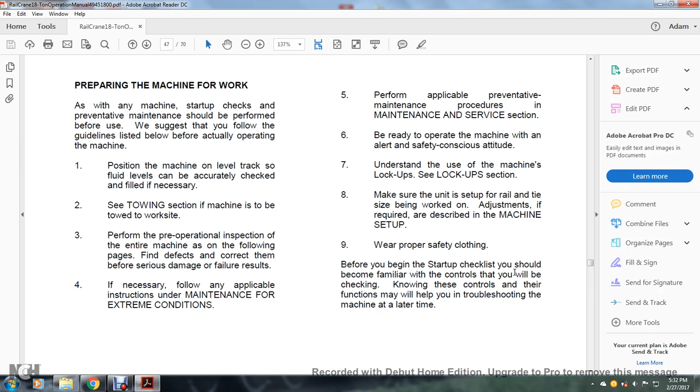Before you begin the startup checklist, you should be familiar with the controls that you should be checking. Knowing these controls and their functions may be helpful to you with troubleshooting the machine at a later time.

Startup warning: this machine must not be used until it is inspected and operating properly. Do not operate this machine unless you have been properly trained as described in the operation and safety manual, and are a qualified person authorized to operate the machine.

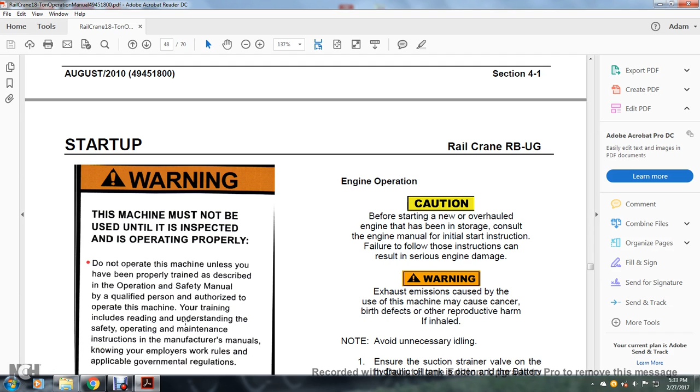Your training includes reading and understanding the safety, operation, and maintenance instructions in the manufacturer's manual, knowing the employer's work rules and applicable government regulations, and following the instructions of the operating manual.

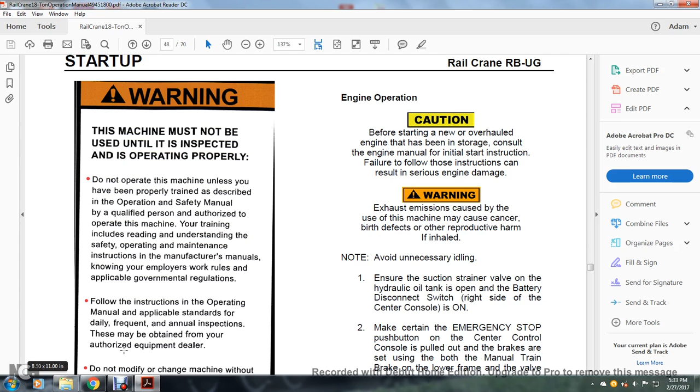Applicable standards for the daily, frequent, and annual inspections may be obtained from the dealer, an authorized equipment dealer. Do not modify or change the machine without written approval of the manufacturer.

Operate the machine with extreme caution. Stop all operations if any malfunctions occur. Improper use of this machine could cause death or serious injury.

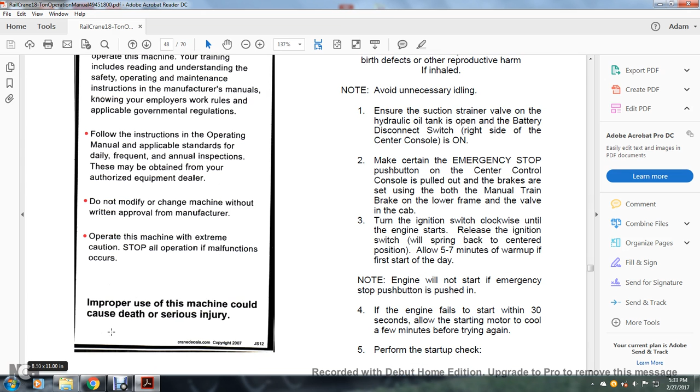Engine operation caution: before starting a new, overhauled, or stored engine, consult the engine manual for the initial startup instructions. Failure to follow these instructions can result in serious engine damage.

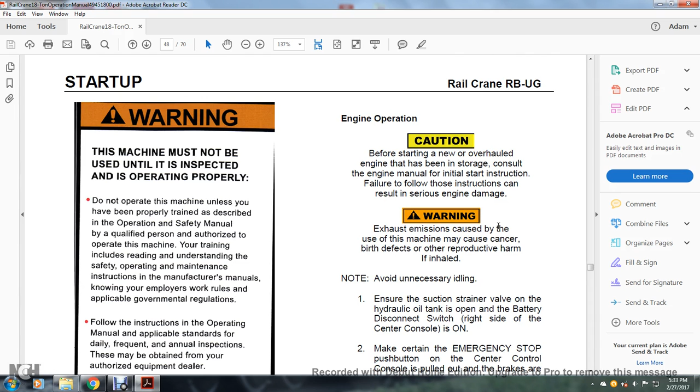Warning: exhaust emissions caused by operating the machine may cause cancer, birth defects, or other reproductive harm if inhaled. Note: avoid unnecessary idling. Ensure the suction strainer valve on the hydraulic oil tank is open.

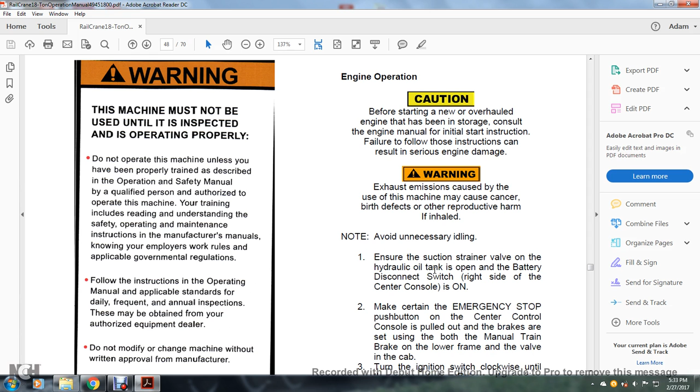Make sure the battery disconnect switch on the right side of the central console is on. Make sure the emergency stop push button on the central console is pulled out, and the brakes are set on both the manual train brake on the lower frame and the valve in the cab.

Turn the ignition switch clockwise until the engine starts, then release the ignition switch; it will spring back to the center position. Allow 5 to 7 minutes for warm-up on the first start of the day.

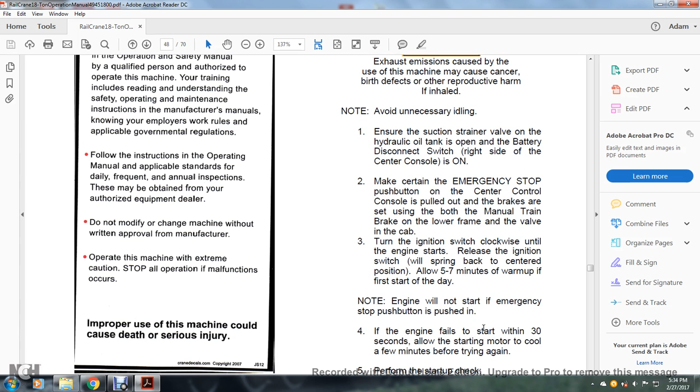Note: the engine will not start if the emergency stop push button is pushed in. If the engine fails to start within 30 seconds, allow the starting motor to cool for a few minutes before trying again. Then perform the startup checkup.

Startup checklist, general machine status: verify all load chart safety warning labels and control labels are present and legible. Make certain all safety devices function properly. Ensure swing lockouts are installed between the counterweight and the lower deck prior to starting the engine.

Check the hydraulic system hoses, tubes, and fittings for leaks. Inspect the lattice booms, checking for bends or other damage. Do not operate the machine if defects are present.

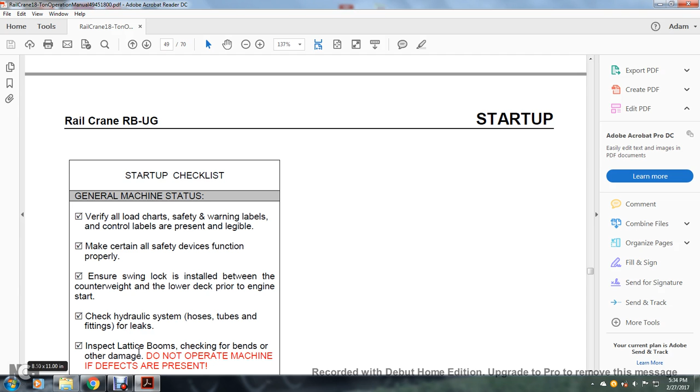Inspect the winches; make sure the wire rope is properly reeved on the sheaves, and that all connection pins and retaining devices are properly installed. Inspect the wire ropes; do not operate the machine if defects are present.

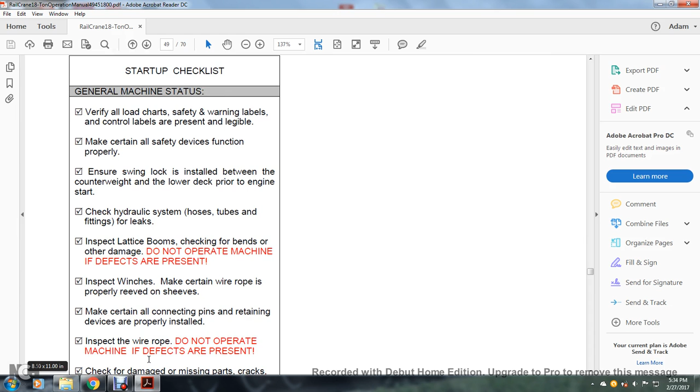Check for damage, missing parts, cracks, or bends. If any of these are present, do not operate the machine until repaired.

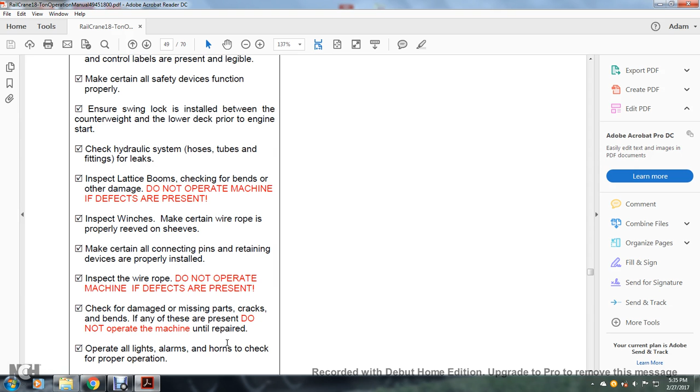Operate all the lights, alarms, and horns to check for proper operation. Test the anti-two-blocking device to check for proper operation. Inspect all controls, cables, and harnesses to make certain all connections are tight and the controls function properly.

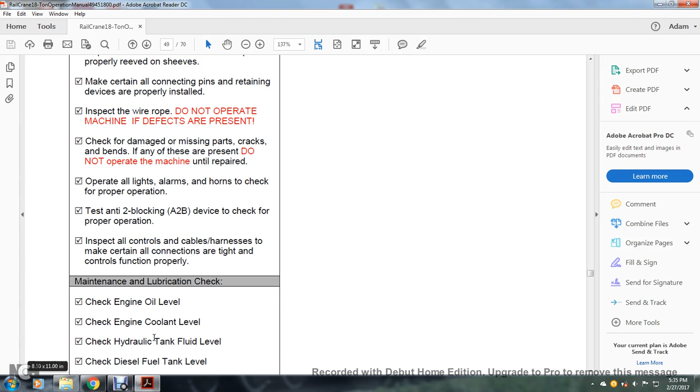Maintenance lubrication oil check: check the engine oil level, check the engine coolant level, check the hydraulic tank fluid level, and check the diesel fuel tank fluid level. Perform all daily maintenance requirements; see inspection maintenance later in this manual.

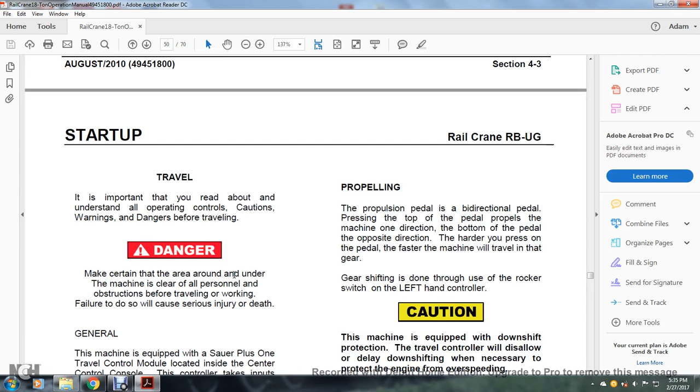Or continue with startup and travel. It's important that you read and understand all the operating controls and the caution, warning and danger notes before traveling. Danger: make certain that the area around and under the machine is clear of all personnel and obstructions before traveling and working. Failure to do so can cause injury or death.

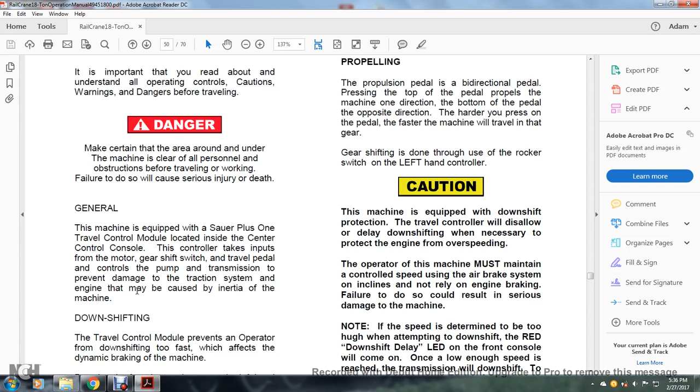General. This machine is equipped with a Sauer Plus One travel control module located inside the center of the control console. The control takes the inputs of the motor, gear shift switch, travel pedal, and control of the pump and transmission to prevent damage to the traction system and the engine that may be caused by the machine. The travel control module prevents the operator from downshifting too fast. This affects the dynamic braking of the machine.

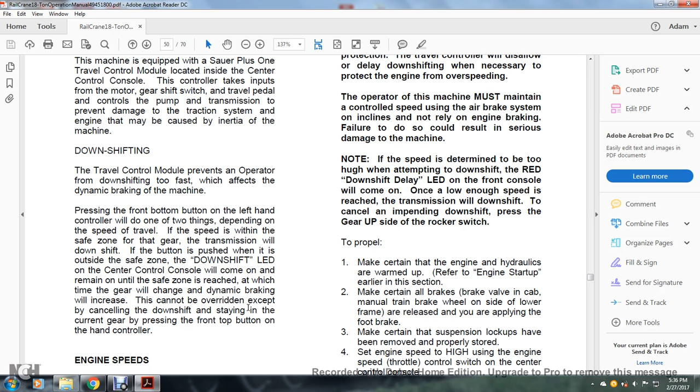Press the front of the button with the left hand and the control will do one of two things depending on the speed of travel. If the speed is within the safety zone for the gear, the transmission will downshift. If the button is pushed outside the safety zone for the downshift, the LED on the control console will come on and remain until the safe zone is reached. At that time the gear will change and the dynamic braking will increase. It cannot be overridden except by canceling the downshift and staying in the current gear, pressing the front top of the button on the hand controller.

Engine speeds. Engine speed settings are preset, and the high and low speeds are selected using the engine speed control switch on the center console. Engine speed should be at a high of 2100 RPM during travel and work operations and at a low of 1100 RPM while idling.

Propelling. The propulsion pedal is a bidirectional pedal. Press the top of the pedal to propel the machine in one direction, the bottom of the pedal in the opposite direction. The harder you press on the pedal, the faster the machine will travel in the gear. Gear shifting is done through the use of the rocker switch on the left hand controller.

Caution, the machine is equipped with downshift protection. The travel control will also disallow or delay downshifting when necessary to protect the engine from overspeeding. The operator of the machine must maintain control of speed using the air brake system on inclines. Do not rely on engine braking. Failure to do so could result in serious injury and damage to the machine.

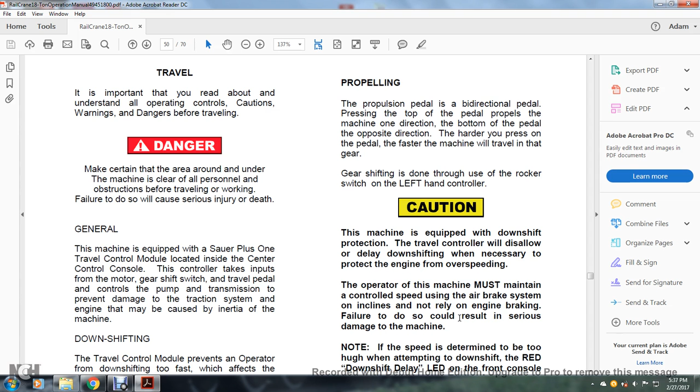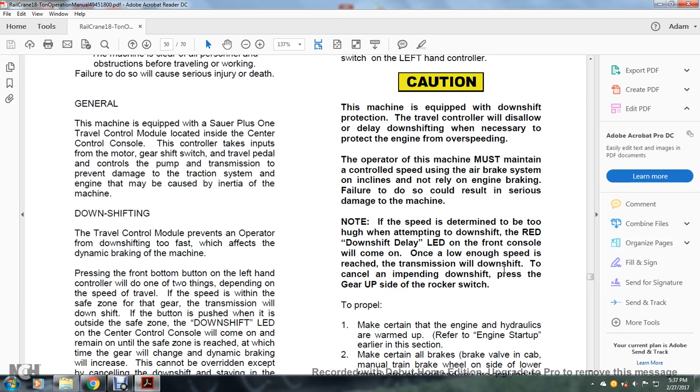Note, if your speed is determined to be too high when attempting to downshift, the red downshift delay LED on the front console will come on. Once a low enough speed is reached, the transmission will downshift. To cancel an impending downshift, press the gear up on the rocker switch.

Alright, to propel, make certain that the engine and the hydraulics are warmed up. Refer to the engine startup earlier in this section. Make certain that the brake valve in the cab and the manual train brake wheel on the side of the lower frame are released, so that you are applying the foot brake. And make certain that the suspension lockups have been removed and properly stored. And set the engine to high speed using the engine speed throttle control switch on the center of the console.

5. Release the brake foot pedal. 6. Use the rocker switch on the left hand control front push button, looking at the gear selection LEDs on the center console. Press the switch in the up direction once and slowly press the propulsion pedal until the machine reaches top speed in that gear. Release the pedal halfway, to 50%, press the gear switch again, and repeat until the desired speed and gear has been reached.

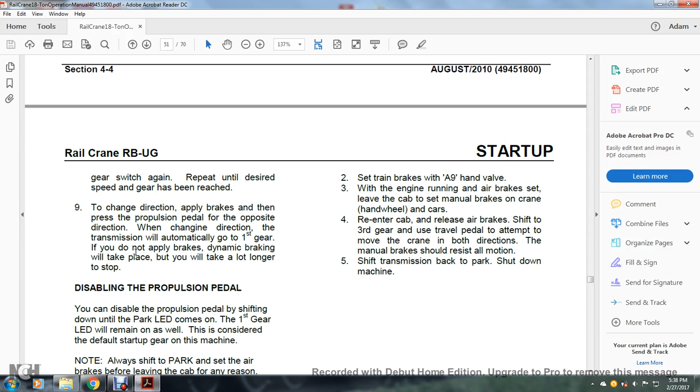To change direction, apply the brakes, then press the propulsion pedal in the opposite direction. When changing direction, the transmission will automatically go into first gear. If you do not apply the brakes, dynamic braking will take place, but it will take a lot longer to stop.

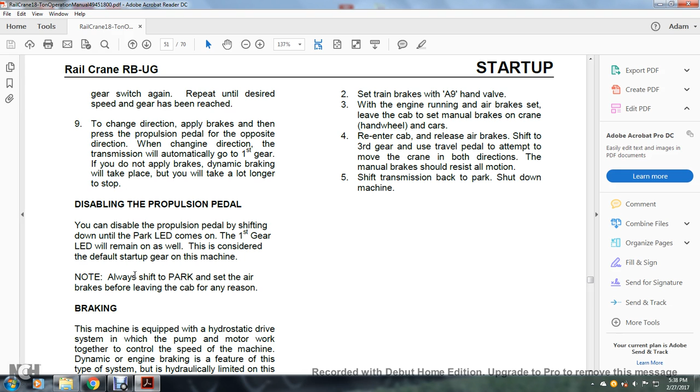Disabling the propulsion pedal. You can disable the propulsion pedal by shifting down until the LED comes on, and the first gear LED will remain on as well. This is considered the default startup gear on the machine. Note, always shift to park and set the air brakes before leaving the cab for any reason.

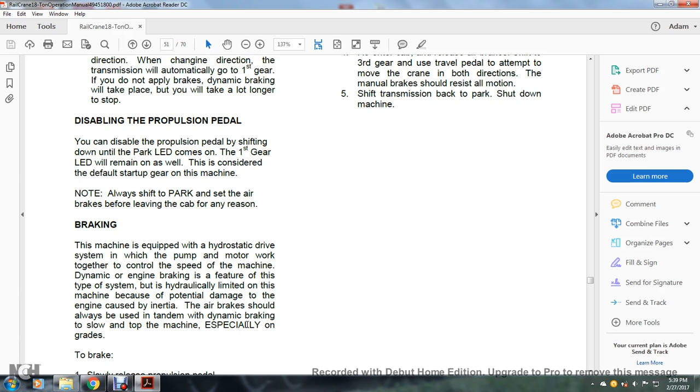Braking. The machine is equipped with a hydrostatic drive system in which the pump and the motor work together to control the speed of the machine. Dynamic engine braking is a feature of this type of system, but it is limited on this machine because of the potential damage to the engine. The air brakes should always be used in tandem with dynamic braking to slow and stop the machine, especially on grades. To brake, slowly release the propulsion pedal, slowly apply the brake pedal, and downshift as permitted.

Parking brakes. Warning, do not leave the crane unattended without setting the manual brake system.

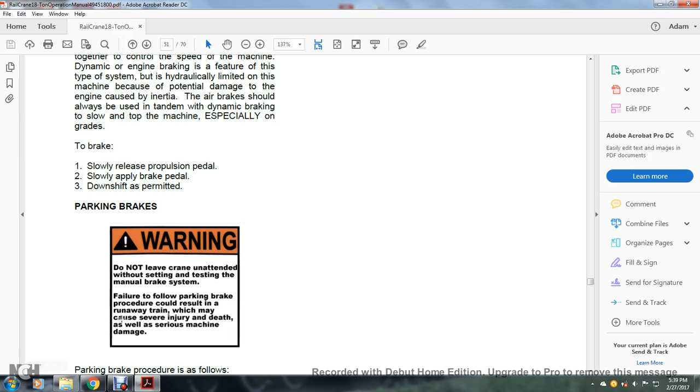Failure to follow the parking brake procedure could result in a runaway train, which may cause severe injury, death, as well as serious injury and machine damage. Parking brake procedures as follows. Ensure the machine has come to a complete stop and then shift the transmission to park. Set the train brakes at A9 hand valve.

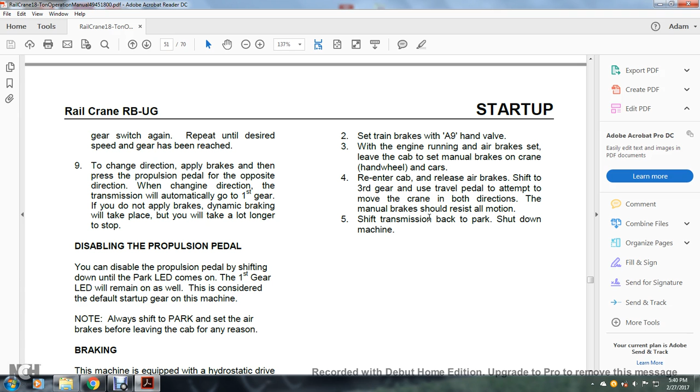With the engine running and the air brakes set, leave the cab to set the manual brakes on the crane and the hand wheel in the cars. Re-enter the cab, release the air brake, shift to the third gear, and use the travel pedal to attempt to move the crane in both directions. The manual brakes should resist all motion, and shift transmission back to park. Shut down machine.

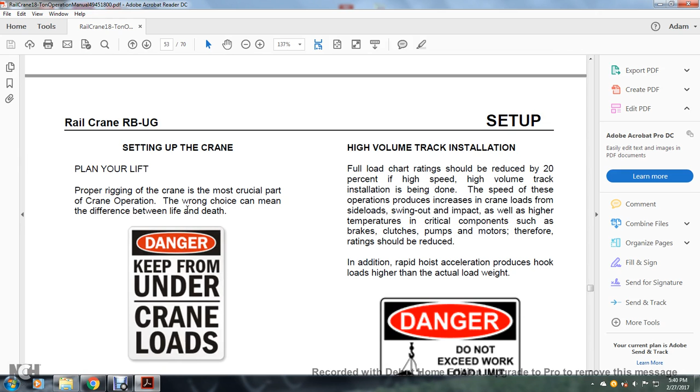Setting up the crane. Plan your lift. Proper rigging of the crane is the most crucial part of the crane operation. Wrong choice can mean the difference between life and death. Danger. Keep out from under the crane loads. Danger. Failure to obey the following will result in death or serious injury and instability, structural damage.

Read and understand the following: the crane load work area charts. Do not exceed the winch or crane ratings. Weight limited. The weight of accessories attached to the boom and the load must be deducted from the load chart ratings and added with the load weight. Do not exceed the manual boom extension or jib load ratings at reduced boom lengths.

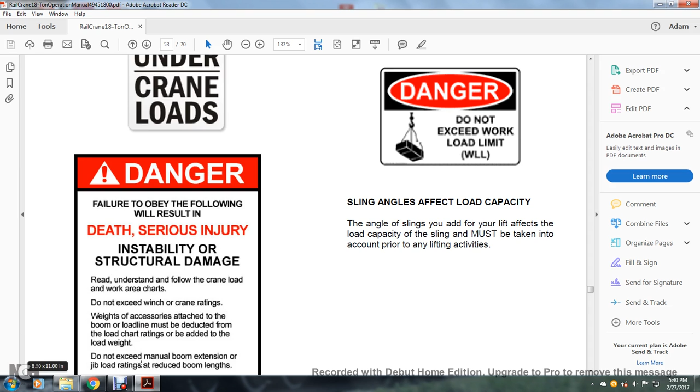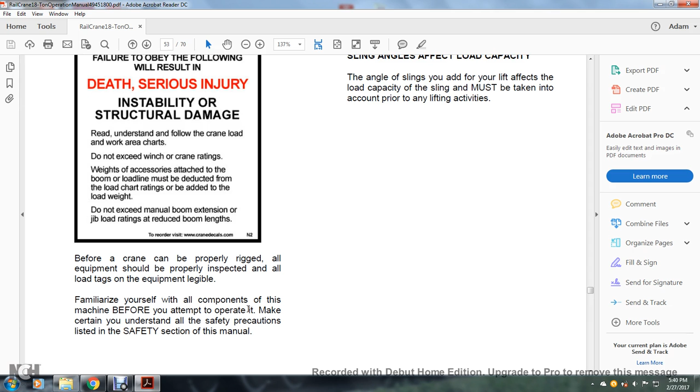Before the crane can be properly rigged at all, the equipment should be properly inspected and all load tags on the equipment legible. Familiarize yourself with all the components of the machine before you attempt to operate it. Make sure that you understand all the safety precautions listed in the safety section of this manual.

High volume track installation. The full load chart rating should be reduced by 20% if high speed, high volume track installation is being done. The speed of these operating procedures increases the crane loads from side loads, swing out and impact, as well as higher temperatures on critical components such as brakes, clutches, pumps, motors, and therefore ratings should be reduced. Additionally, rapid hoist acceleration produces a hook load higher than the actual load weight.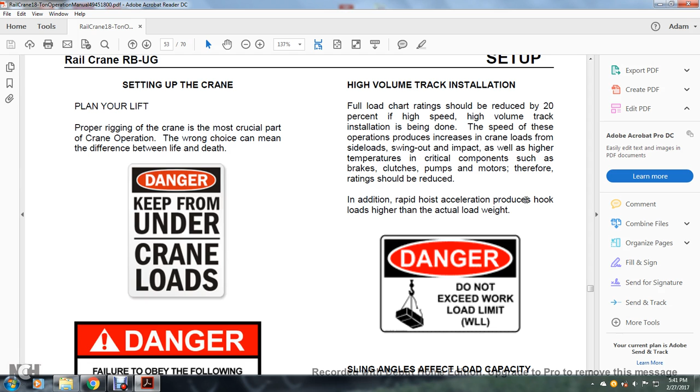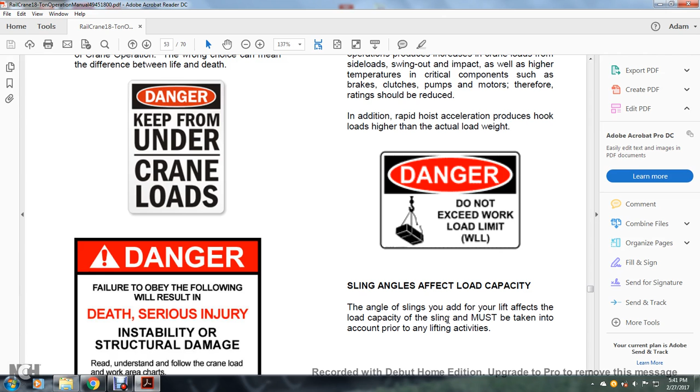Danger: do not exceed the working load limit. Sling angles affect the load capacity. The angles of slings you use for your lift affect the loading capacity of the sling and must be taken into account prior to any lifting activities.

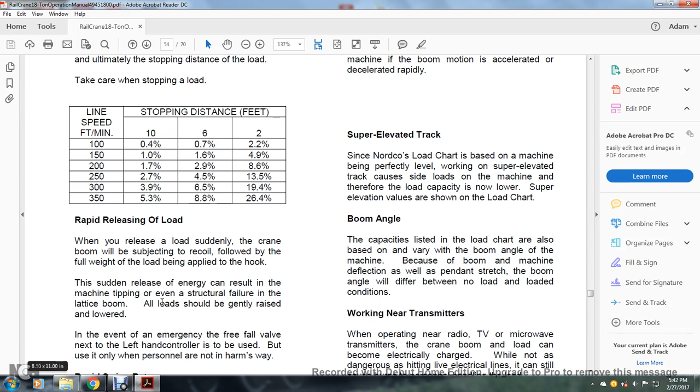Rapidly releasing loads. When you release the load suddenly, the crane boom will be subject to recoil, followed by the full weight of the load being applied to the hook. The sudden release of the energy could result in the machine tipping and even in structural failure in the lattice boom. All loads should be gently raised and lowered. In the event of an emergency, free fall: the valve next to the left-hand control is to be used only when personnel are not in harm's way.

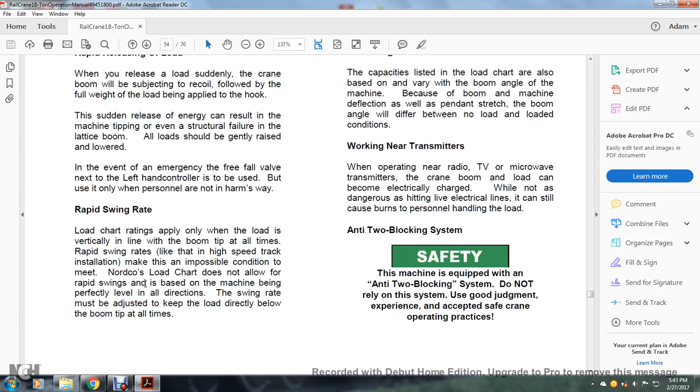Rapid swinging rate. Load charts. The rating is applied only when the load is vertically in line with the boom tip at all times. Rapid swing rates, like on any high-speed track installation, make it an impossible condition to meet. The Nordco load chart does not allow for rapid swing rates and is based on the machine being perfectly level in all directions. The swing rate must be adjusted to keep the load directly below the boom tip at all times.

The centrifugal force of a high-speed swing creates a forward tipping load. At a high boom angle, the boom could collapse over the back of the machine if the boom motion is accelerated or decelerated rapidly. Super elevated track: since Nordco load charts are based on the machine being perfectly level, working on super elevated track causes side loading of the machine, and therefore load capacity is now lower. Super elevation values are shown in the load chart.

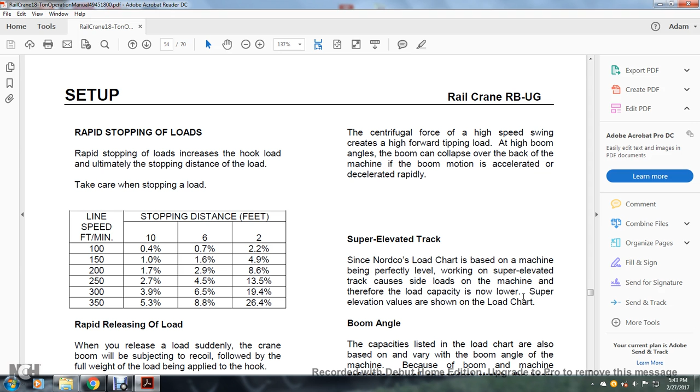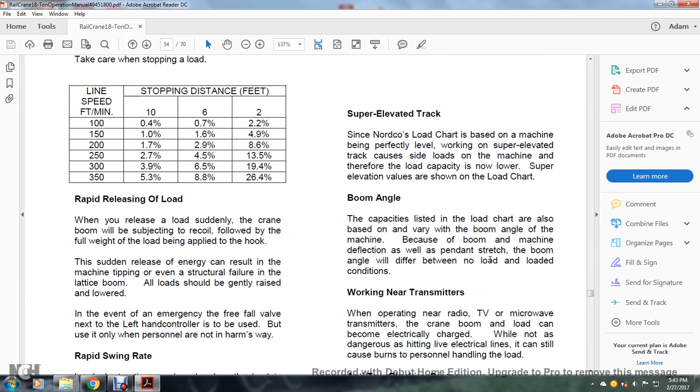Boom angle: the capacities listed on load charts are also based on the boom angle of the machine. Due to boom deflection as well as pendant stretch, the boom angle will differ between no load and loaded conditions. Working near transmitters.

When operating near a radio, TV, or microwave transmitter, the crane boom and the load can become electrically charged. While not as dangerous as hitting live electrical lines, it can still cause burns to personnel handling the load.

Anti-two-blocking system. Safety. The machine is equipped with an anti-two-blocking system. Do not rely on the system. Use good judgment, experience, and accepted safe crane operation practices.

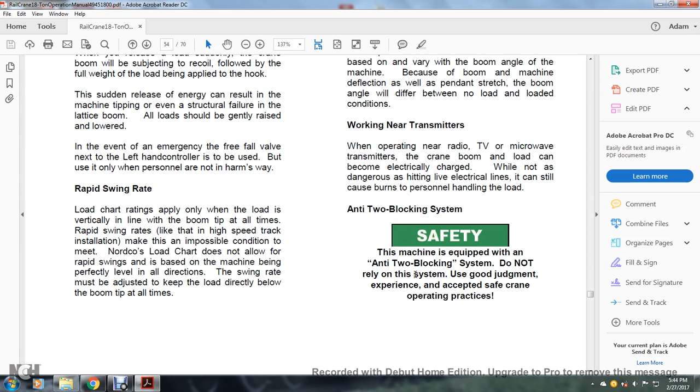Alright, two-blocking the winch cable can happen with an untrained and inexperienced operator. Two-blocking occurs when the winch cable has been retracted too far, or if the boom is extended without letting out the cable. Either way, the winch cable can be damaged by crimping or over-tension, and the sheave may also be damaged. The anti-two-blocking system helps prevent this kind of damage by sensing the position of the winch cable attachments with respect to the sheave case, and shutting down the function causing the two-blockage.

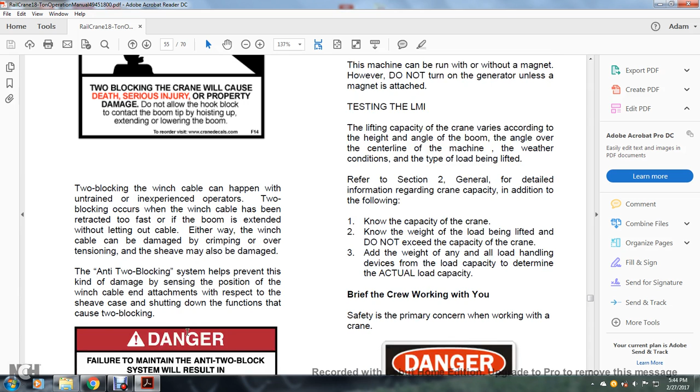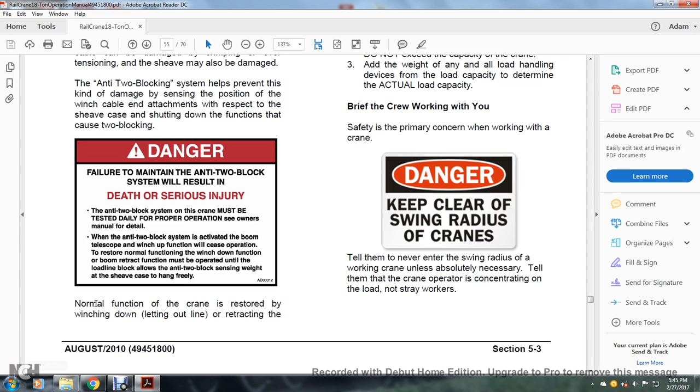Alright, danger. Failure to maintain the anti-two-blocking system will result in death or serious injury. The anti-two-blocking system on the crane must be tested daily for proper operation. See owner's manual for details. When the anti-two-blocking system is activated with boom telescope or winch up, the function will cease operation. To restore normal function, winch down. The retraction function must be operated until the load block allows the anti-two-blocking sensing weight at the sheave case to hang freely. Normal function of the crane is restored by winching down, letting out line, or retracting.

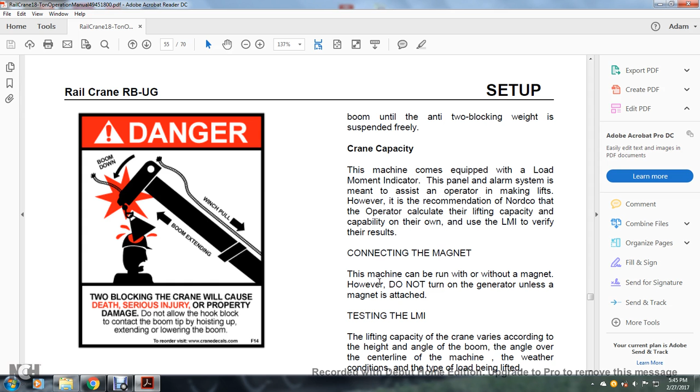Retract the boom until the anti-two-blocking weight is suspended freely. Crane capacity: the machine comes equipped with a load moment indicator panel and alarm system to assist the operator in making lifts. However, Nordco recommends operators calculate the lifting capability on their own and use the load indicator to verify the result. Connecting the magnet: the machine can be run with or without a magnet. However, do not turn the generator on unless the magnet is attached.

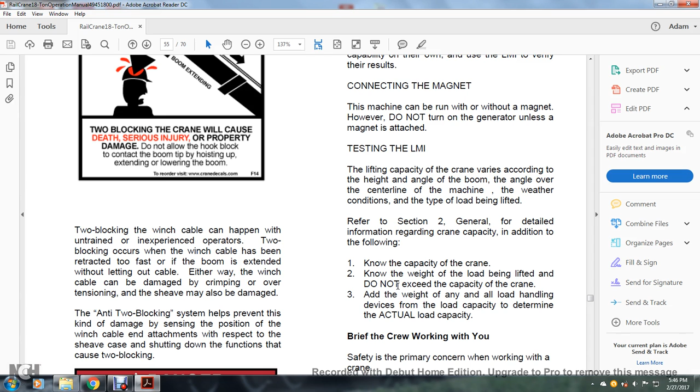Testing the LMI. The lifting capacity of the crane varies according to the height and angle of the boom, the angle from the center line of the machine, the weather conditions, and the type of load being lifted. Refer to Section 2, General, for detailed information regarding crane capacity. In addition, note the capacity of the crane and the weight of the load being lifted, and do not exceed the capacity of the crane. Add the weight of the load and all load handling devices to determine the actual load.

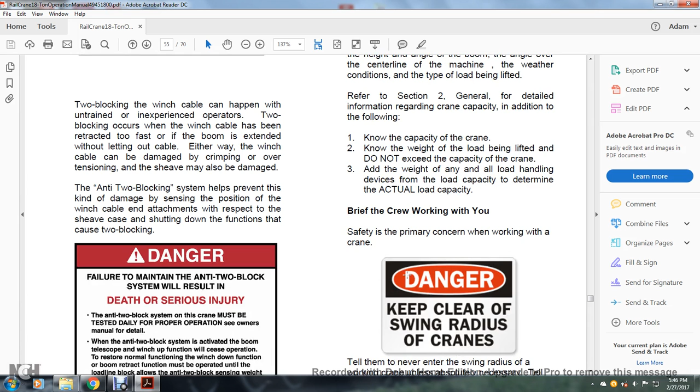Brief the crew workers you're working with. Safety is the primary concern when working with a crane. Danger, keep clear of the swing radius of the crane. Tell them never to enter the swing radius of a working crane unless absolutely necessary. Tell them the crane operator is concentrating on the load, not stray workers.

Weather safety conditions. Weather conditions can adversely affect lifting activity and need to be thoroughly considered during the planning and execution of the lift. Special efforts may be required to ensure adequate warning is provided to avoid a sudden storm disrupting lifting progress.

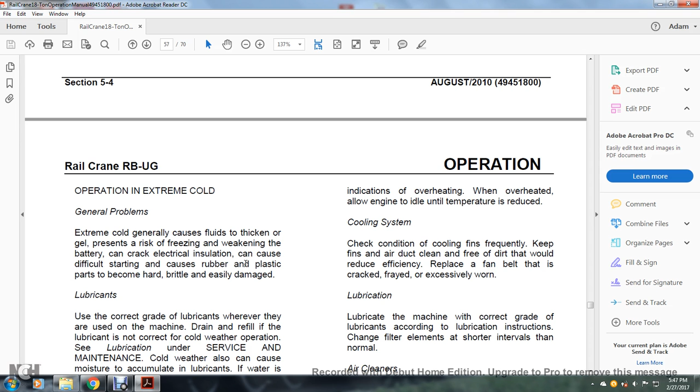Operation in extreme cold. General problems. Extreme cold generally causes fluids to thicken and gel, presents the risk of freezing, weakens the battery, can crack electrical insulation, and causes the rubber and plastic parts to become hard, brittle, and easily damaged. Lubrication. Use the correct grade of lubrication; drain and refill if the lubrication is not correct for cold weather operation. See lubrication under the section on maintenance.

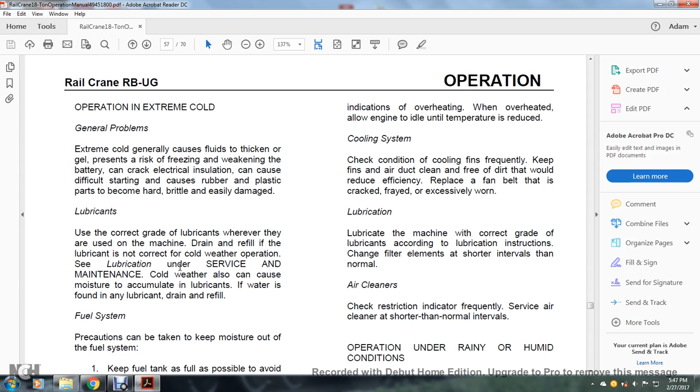Cold weather can also cause moisture to accumulate in lubricants. If water is found in any lubricant, drain and refill. Fuel system: precautions should be taken with care to keep moisture out of the fuel system. Keep the fuel tank as full as possible to avoid condensation. Remove ice and snow from the area of the fill opening before refilling.

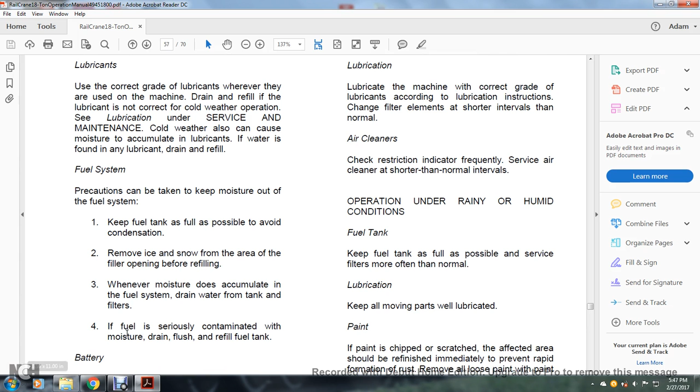Whenever moisture does accumulate in the fuel system, drain water from the tank and the filters. If the fuel is seriously contaminated with moisture, drain, flush, and refuel the tank. Fuel tank. Battery. Keep the battery fully charged. Cranking power of the battery is reduced in extreme cold.

Engine operation. Run the engine at low speeds only long enough to circulate the oil through the engine, and then increase the speed to warm up the engine. Extended idling during extreme cold temperatures can cause incomplete combustion and heavy deposit formation on the valves.

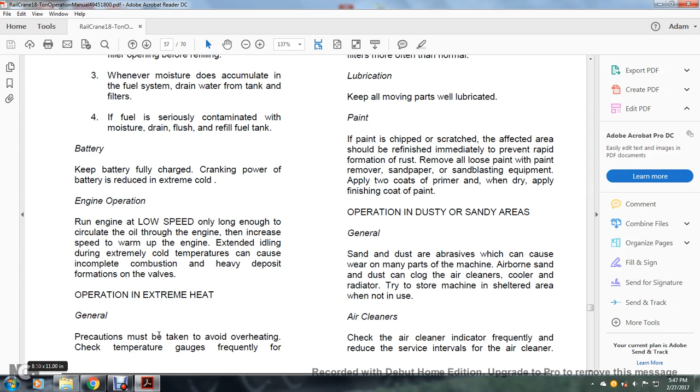Operation in extreme heat. General precautions must be taken to avoid overheating. Check the temperature gauge frequently for indication of overheating. When overheated, allow the engine to idle until the temperature is reduced. Cooling system. Check the condition of the cooling fins frequently. Keep the fins and air duct clean and free of dirt that would reduce the efficiency. Replace the fan belt when it is cracked, frayed, or excessively worn.

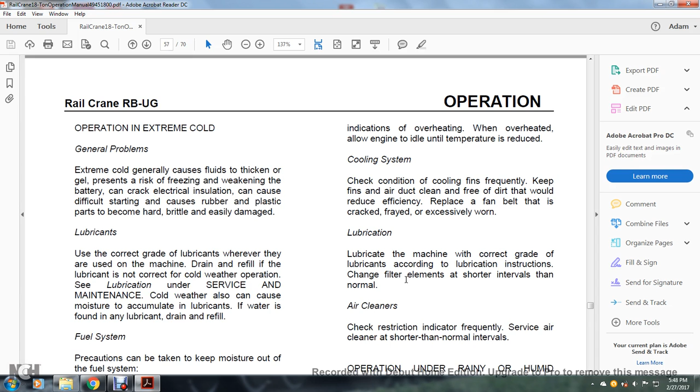Lubricate the machine with the correct grade of lubricants according to the lubricating instructions. Change the filter elements at shorter intervals than for the normal air cleaner. Check the restriction indicator. Service the air cleaner more frequently, at shorter than normal intervals.

Operating under rainy and humid conditions. Keep the fuel tank as full as possible. Then service the fuel filters more often than normal. Lubrication: keep all the moving parts well lubricated.

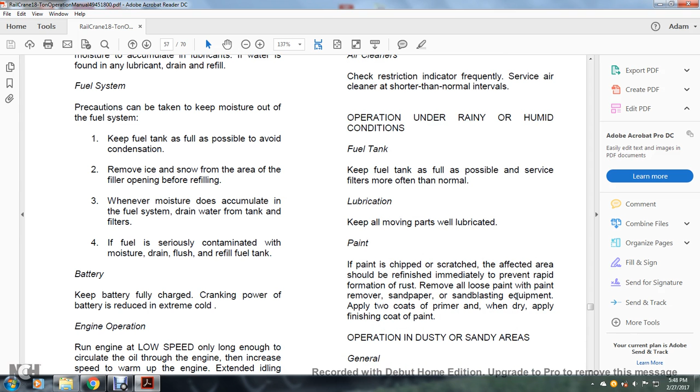Paint. If the paint is chipped or scratched and exposed to the air, it should be refinished immediately to prevent the rapid formation of rust. Remove all the loose paint. Remove it with sandpaper or sandblasting equipment. Apply 2 coats of primer, allow drying, and apply the finish coat of paint.

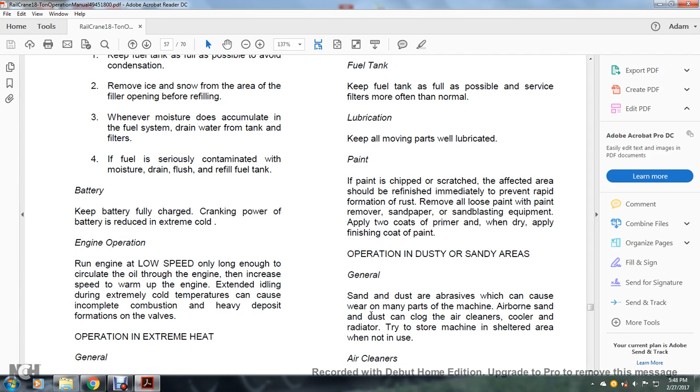Operation in dusty and sandy areas. Generally, sand and dust are abrasive, which can cause wear of many of the parts of the machine. Airborne sand and dust can clog the air cleaners, coolers, and radiator. Try to store the machine in a sheltered area when not in use.

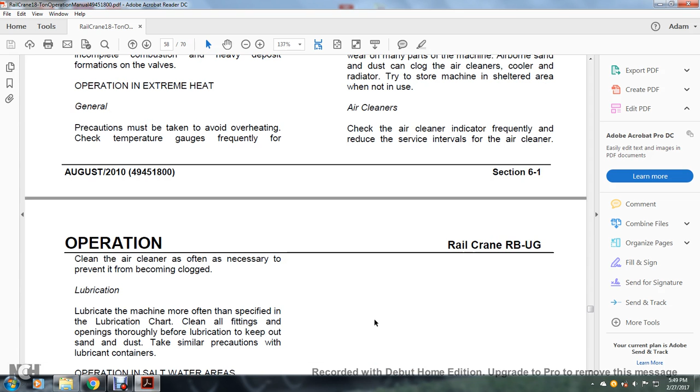Air cleaners. Check the air cleaner indicator frequently and reduce the service intervals for the air cleaner. Cleaning of the air cleaner is often necessary to prevent it from being clogged. Lubrication: lubricate the machine more often than specified in the lubricating chart. Clean all the fittings and openings before lubrication to keep out the sand and dust. Make sure to take similar precautions with lubricating containers.

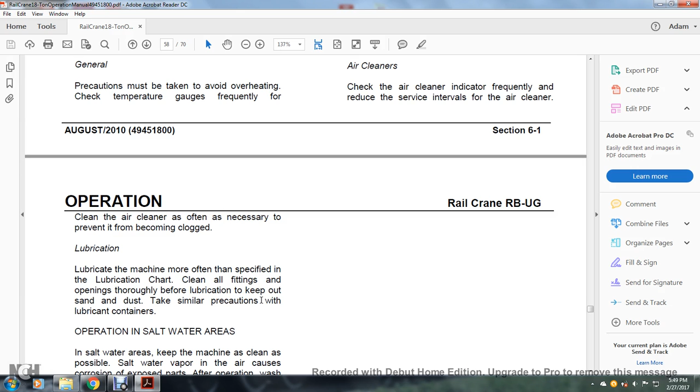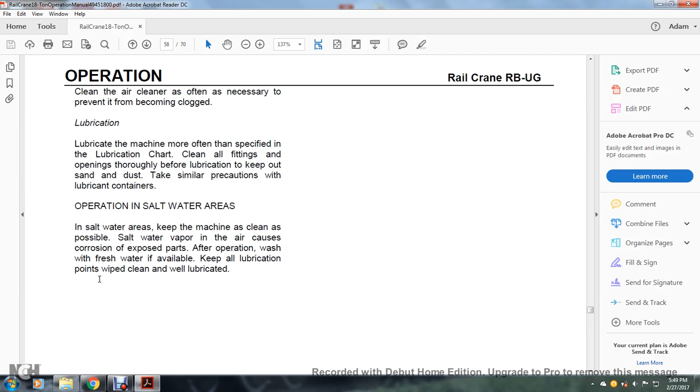Operation in salt water areas. In saltwater areas, keep the machine as clean as possible. Salt water vapor in the air causes corrosion of the exposed parts. After operation, wash with fresh water if available, and keep all lubrication points wiped clean and well lubricated.

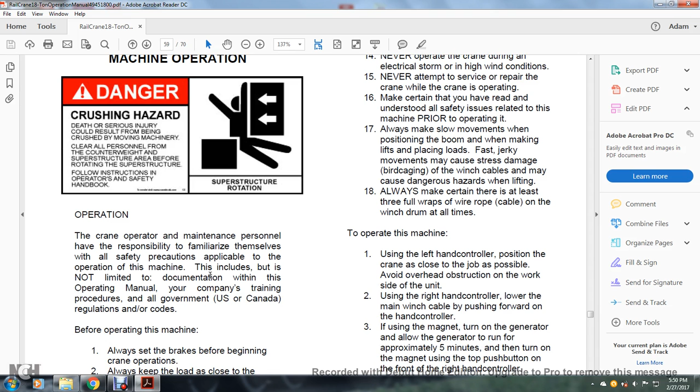The crane operator and maintenance personnel have the responsibility to familiarize themselves with all safety precautions applicable to the operation of the machine. This includes, but is not limited to, the documentation within the Operating Manual, company training procedures, and all government, U.S. and Canada regulations and/or codes before operating the machine.

Always set the brakes before beginning crane operation. Always keep the load as close to the ground as possible. Never swing a load so that it passes over personnel on the ground. Always make certain that the area around the superstructure is clear of all personnel prior to rotation. 5. Never rotate the crane too fast for the load applied. Never operate the crane if the boom is going to be within 10 feet of a power line.

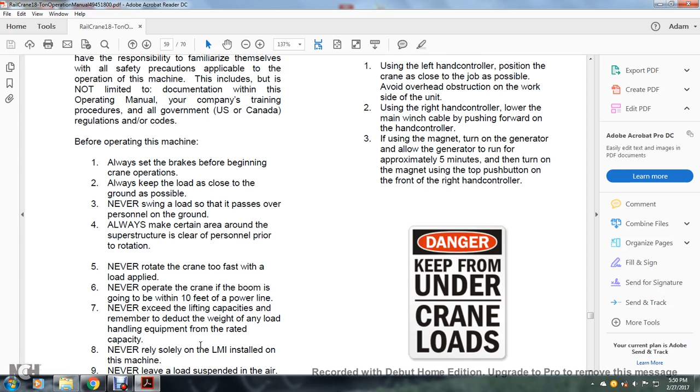Never exceed the lifting capacity. Remember to deduct the weight of any load handling equipment from the rated capacity. Never rely solely on the load moment indicator installed in this machine. 9. Never leave a load suspended in the air. Never use the boom to drag a load into position before lifting. 12.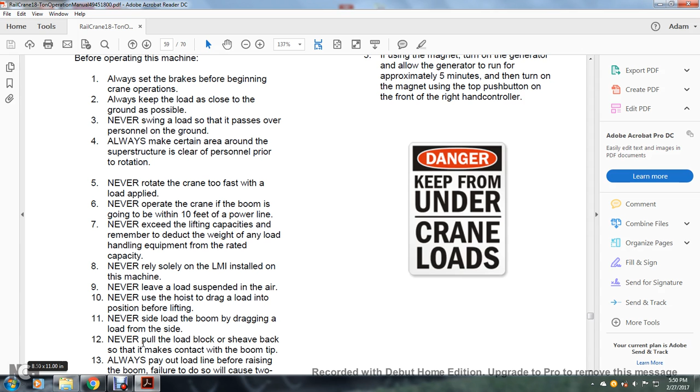Never side load the boom by dragging the load from the side. Never pull the load block or sheave back so that it makes contact with the boom tip. 13. Always pay out the load line before raising the boom. Failure to do so will cause two-blocking of the machine. 14. Never operate the crane during an electrical storm or high wind conditions. And 15. Never attempt to service or repair the crane while the crane is operating.

16. Make certain that you have read and understand all the safety issues related to the machine prior to the operation. 17. Make slow movements when positioning the boom when lifting and placing. Fast jerky movements may cause stress and damage, bird caging of the winch cables, and may cause a hazard when lifting. Always make certain that there are at least 3 full wraps of wire rope on the winch

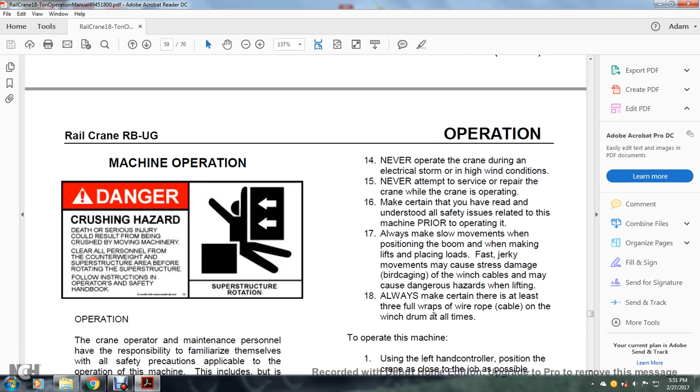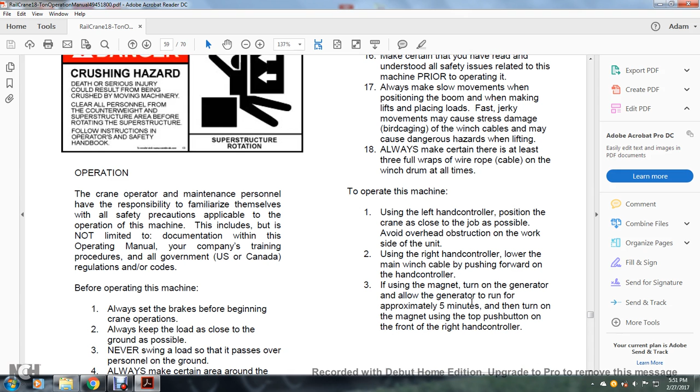drum at all times. To operate this machine, use the left-hand control to position the crane as close to the job as possible. Avoid overhead obstructions on the work side of the unit. Use the right-hand control to lower the main by pushing forward on the hand controller. If using the magnet, turn on the generator. Allow the generator to run approximately 5 minutes. Then turn on the magnet using the top push button on the front of the right-hand controller. Danger: keep from under the crane's loads.

Emergency procedure: if a hydraulic hose fails, shut down the machine immediately. If indications of the gauges are not within the normal range, shut down the engine. Repair them before further operation. Warning: while the crane is supporting the load, there is a stretch of the boom pendant cable and deflection of the boom structure.

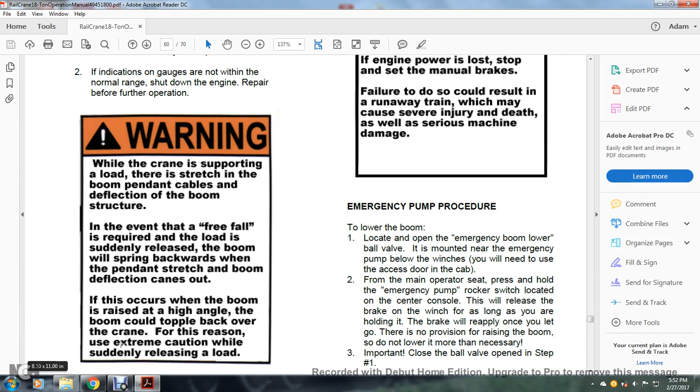In the event free fall is required and the load is suddenly released, the boom will spring backwards when the pendant stretches and the boom deflection comes out. If this occurs when the boom is raised at a high angle, the boom could topple back over the crane. For this reason, be extremely cautious when suddenly releasing the load. If rapid release of the load is required, make certain all personnel are away from the area before pressing the emergency free fall button.

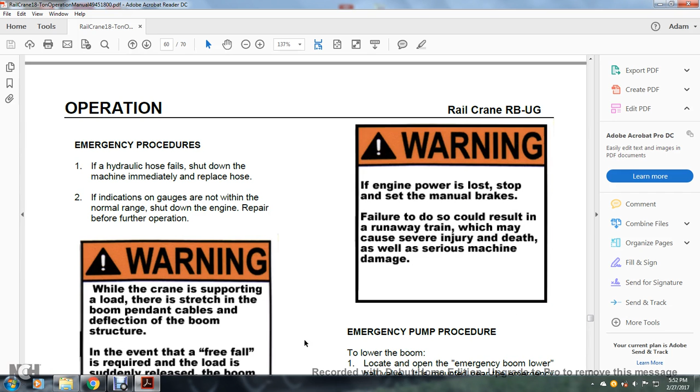Warning: if engine power is lost, stop and set the manual brakes. Failure to do so could result in a runaway train, which may cause severe injury or death as well as serious machine damage. Emergency pump procedures: to lower the boom, locate and open the emergency boom lower ball valve, mounted near the emergency pump below the winches. You will need to use the access door in the cab.

From the main operator's seat, press and hold the emergency pump rocker switch located on the center console. This will release the brake on the winch for as long as you are holding it; the brake will be reapplied once you let it go. There is no provision for raising the boom, so do not lower it more than necessary. Important: close the ball valve opened in step number 1.

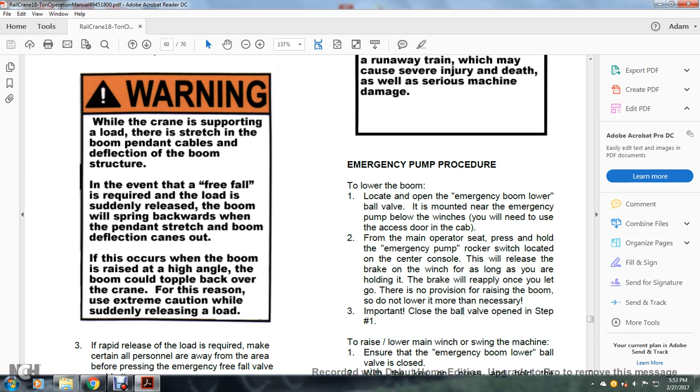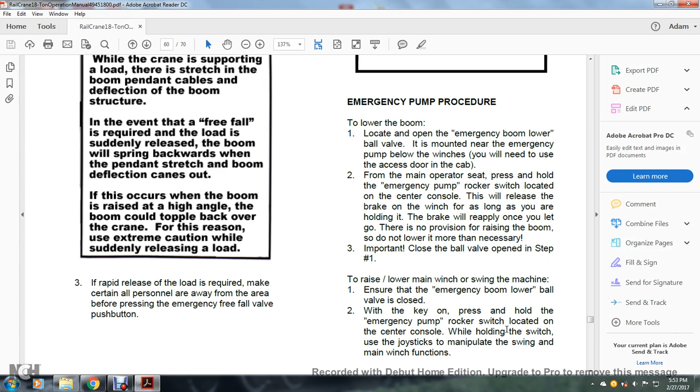2. To raise or lower the main winch or swing the machine, ensure the emergency boom lower ball valve is closed and the key is on. Press and hold the emergency pump rocker switch located on the center console. While holding the switch, use the joysticks to manipulate the swing and main winch functions.

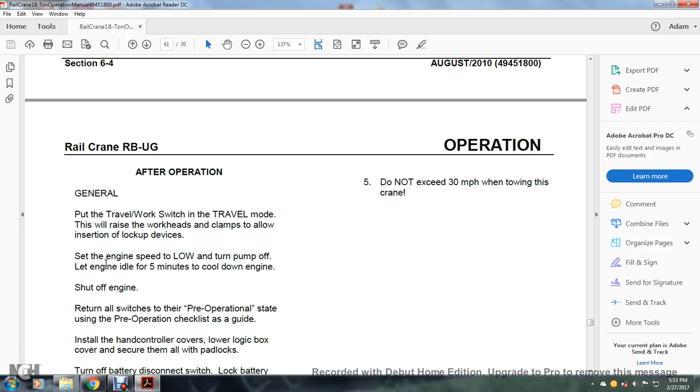After operation, in general, put the travel/work switch in travel mode with the work head raised and the clamps on. Insert the lock device, set the engine speed low, turn off the pump, and let the engine idle for 5 minutes to cool down, then shut off the engine. Then return all the switches to their pre-operational state using the pre-operational checklist as a guide.

Install the handcontroller covers, lower logic box cover and secure them all with the padlocks. Turn off the battery switch. Disconnect and lock the battery in the box. Locate the machine on a level track area if possible, where it will not be exposed to excessive dust. If the machine was towed, disconnect towing, set the brakes, and move the towing vehicle clear of the parked machine.

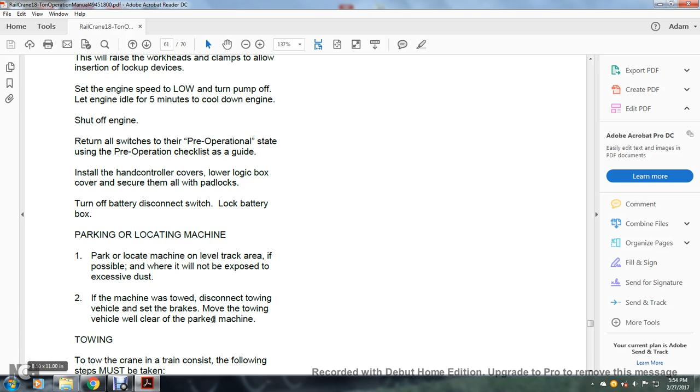Towing. For towing the crane on the track, the following steps must be taken. Avoid injury; the boom can fall when pins are removed. Do not remove the pins until the boom is supported properly by blocking. Suspension ropes are relocated as described in the operator's manual. In the absence of sufficient information in this manual, consult with your manufacturer. Do not deface or remove the labels from this machine.

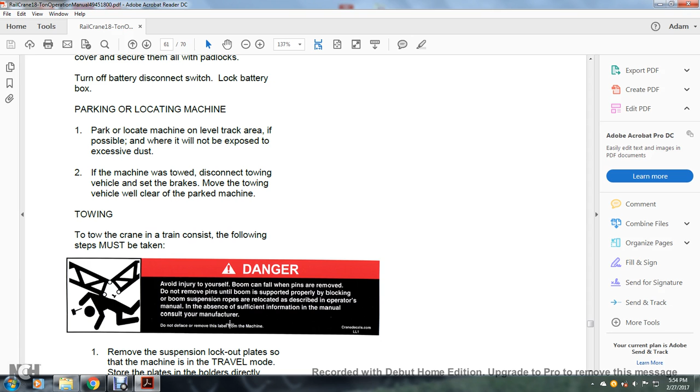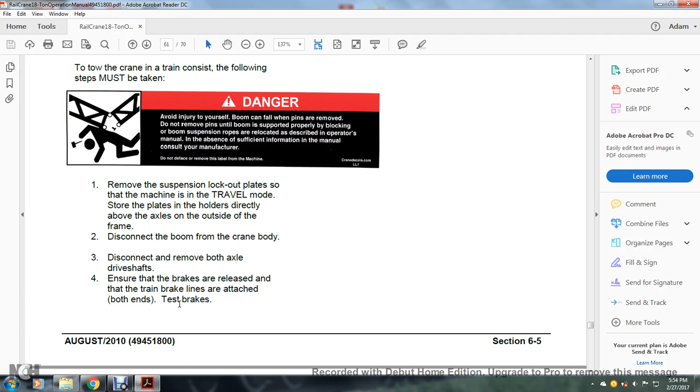1. Remove the suspension lockout plates of the machine in travel mode. Store the plates in the holders directly above the axle on the outside of the frame. Disconnect the boom from the crane body. Disconnect and remove both axle drive shafts and ensure the brakes are released, with the train brake lines attached on both ends, and test the brakes. 5. Do not exceed 30 miles an hour when towing this crane.